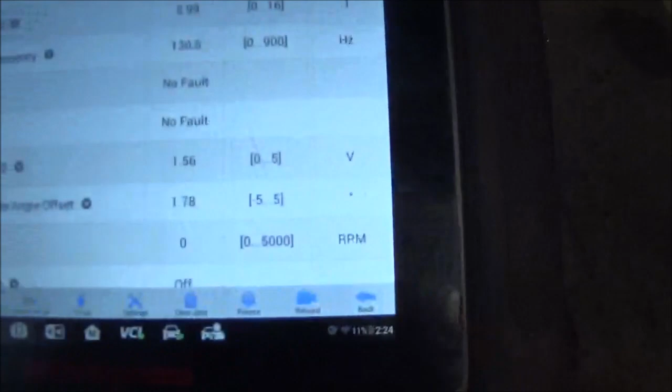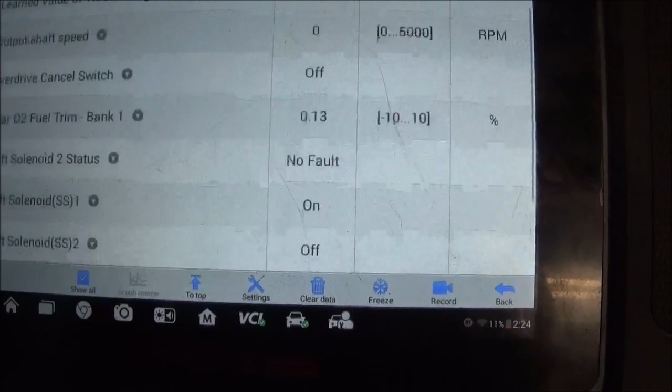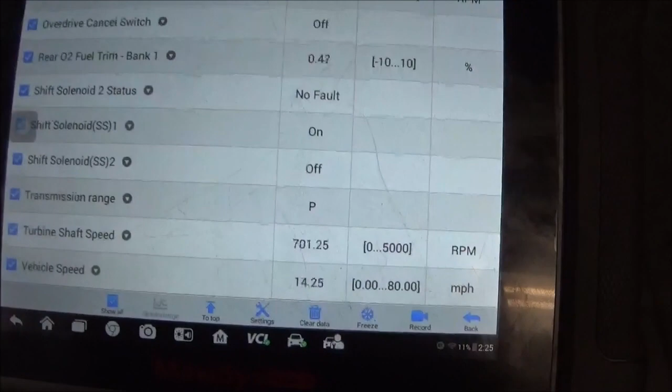Problem we got here, well, this output shaft is not moving. Oh, there, it just moved. Okay. Let me see, where's the output shaft? Yeah. Okay, stop. Go again.

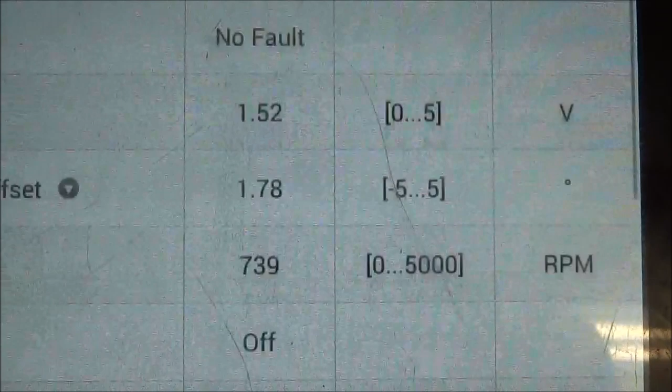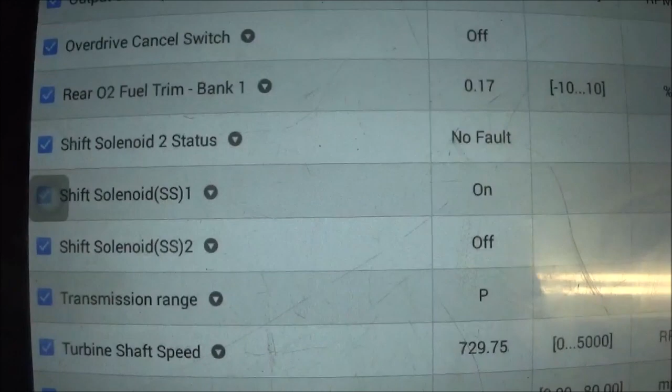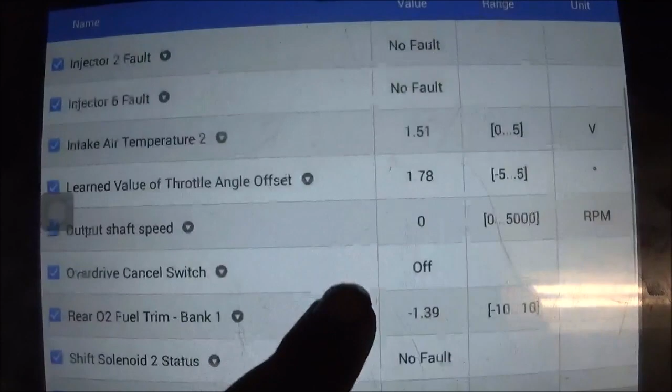Okay, you got the gear commanded is third gear, but it's not shifting. It says that the transmission range is still in park. Okay. Even though it's moving, it says that it's in park. And you're in drive, right? You're in drive, right? All right. Okay, stop.

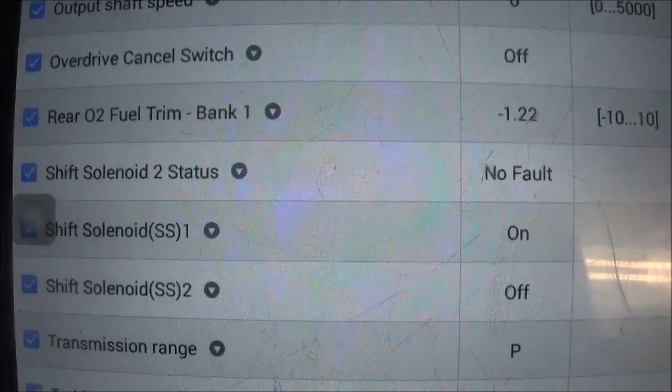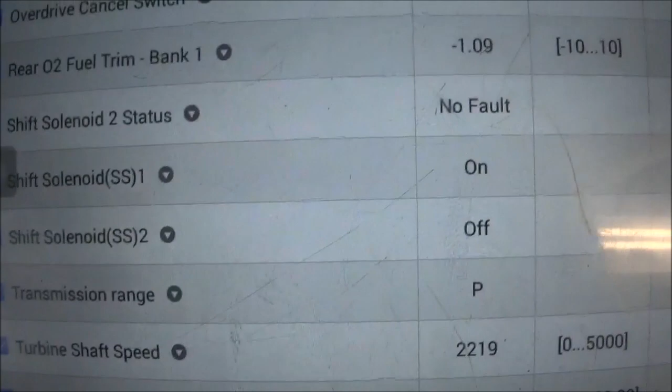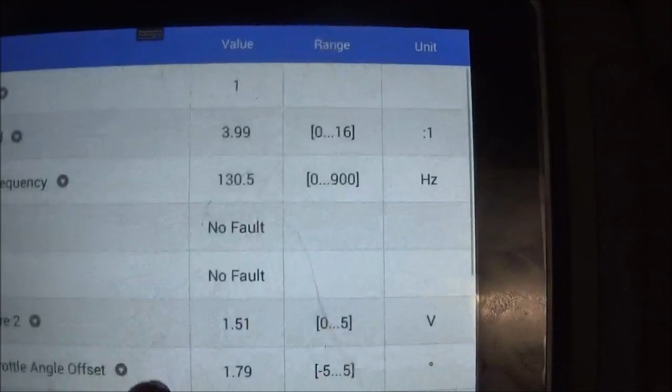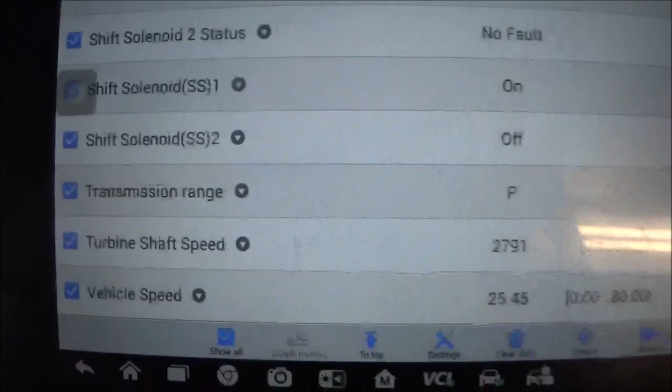Okay, go ahead. Run it up. The shift solenoids are not moving either. They just stay on and off. Turbine speed is showing, but it's not shifting. It does show up here though. Gear commanded is third gear, even though the shift solenoids are not moving, and even though it's saying it's in park. Now we gotta see why it's still saying it's in park. Okay, that's it. We're gonna try to see what's going on.

This black F-150, the problem was the neutral safety switch was bad. Okay, and the park was not moving. Okay, go ahead, Billy, go through the gears.

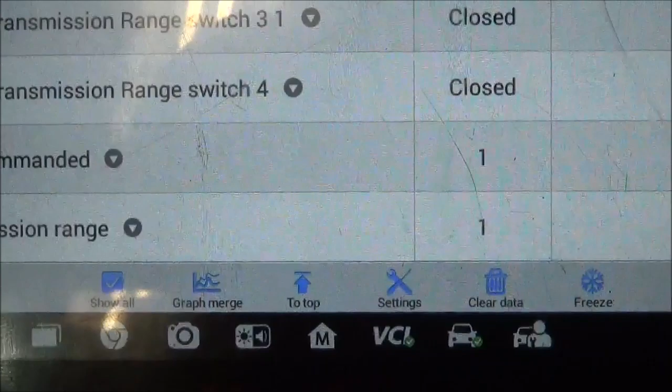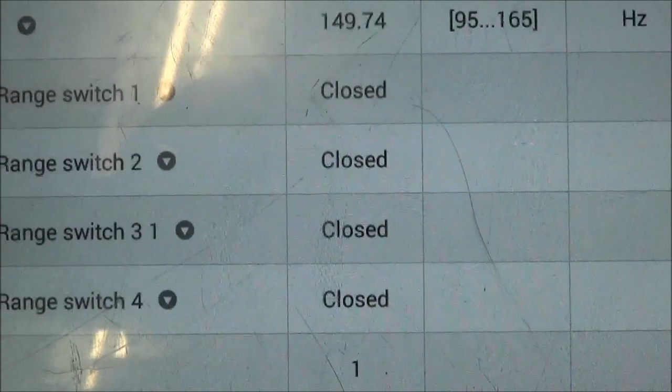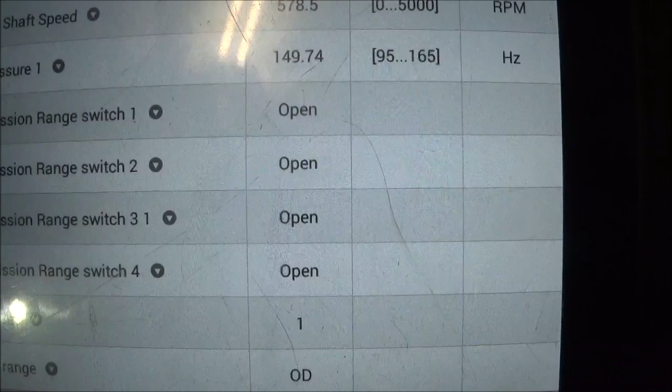Okay, so you get a chance to see that when something is parked, these are the switches, which is digital, transmission range switch 1, 2, 3, and 4. Okay, it's in park now. Reverse. Neutral. Drive. 2 and 1. It's now working. Now put it in drive and let's hear it shift. Drive.

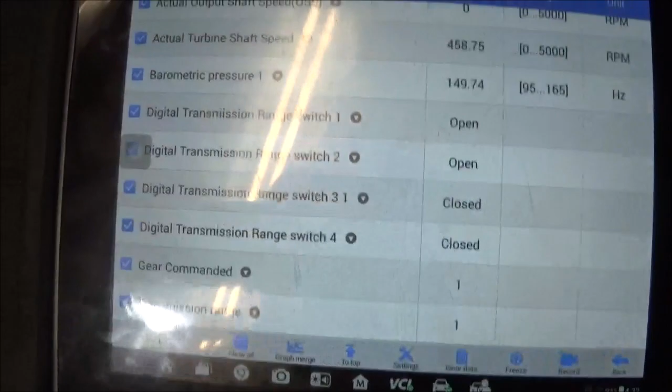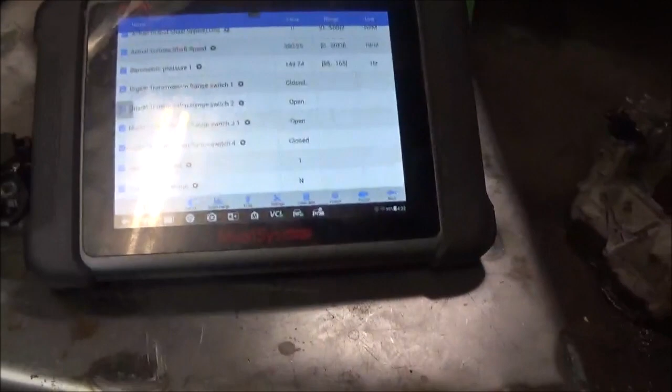All right, I'll let you down. The symptoms here were it did not slip, but it did not shift, and it did not throw a code either. So this is something we had to look at the scanner and see that every gear that he put it in, it still said park. Never had this problem ever, but we had it now. All right, Billy, ready to come down?

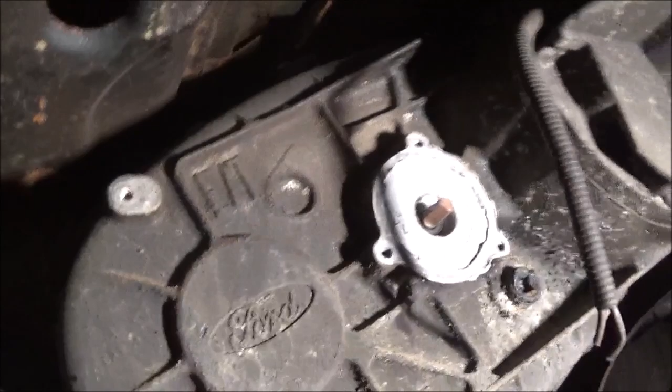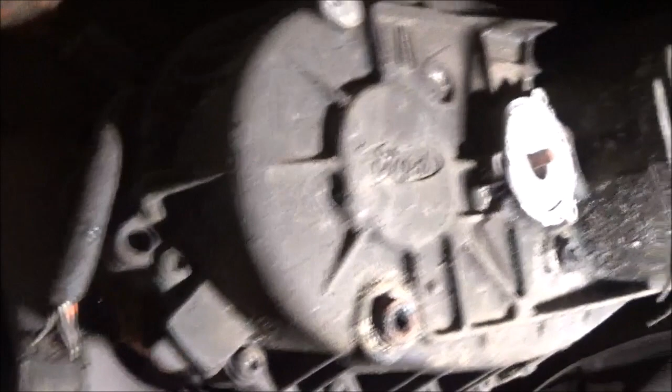Okay, this is that truck that we were working on with the bad neutral safety switch. Something else here, this was stuck in high. The only thing we had to do was get it to shift, but you see that the 4x4 motor wire is gone, and the motor is gone. Now, customer says his brother did something to make sure it didn't go in 4x4. I guess this is what he did. Took the motor off and put it in gear, and maybe he cut the wires. I don't know. But you gotta note this.